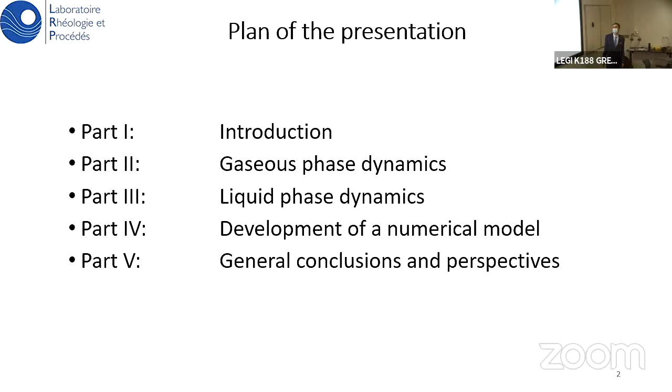Mixing operation in an anaerobic digestion process is a vital operation that aims at reducing non-uniformities in concentration and temperature, and increasing the surface of contact between the substrate and the bacteria, further increasing the yield of the mixing and the yield of gas production.

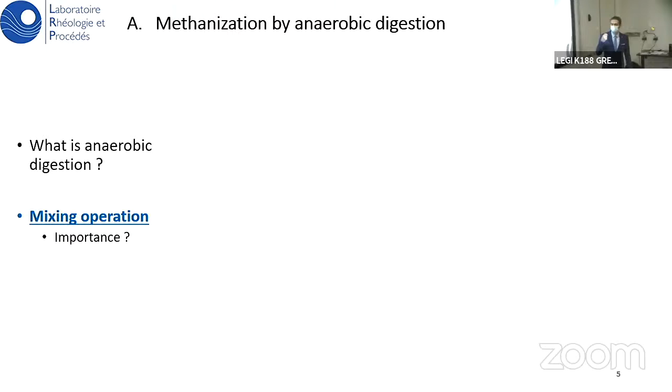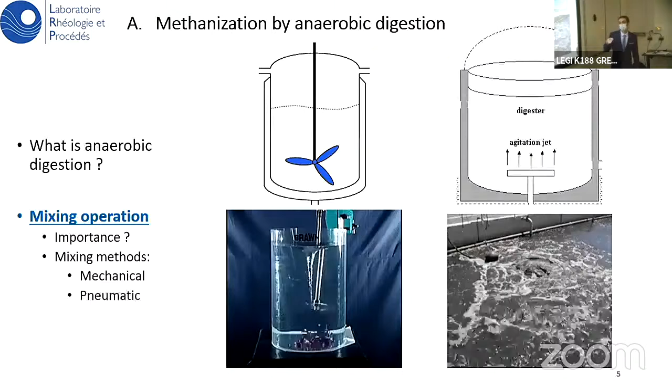It can be attained using two methods: either mechanically, by the use of an electric motor and an impeller that stirs the contents of the reactor, inducing mixing; or by pneumatic mixing, in which pressurized gas is injected inside the contents of the reactor, and the rising bubbles tend to agitate the contents of the reactor.

Pneumatic mixing holds some advantages, or more desirable effects, over mechanical mixing. Mainly, it is a simpler design with fewer moving parts, which causes it to be more cost effective in terms of operation and maintenance. It is also more process friendly, as the induced shear stresses are assured to be lower than the critical shear stresses tolerated by the bacterial culture.

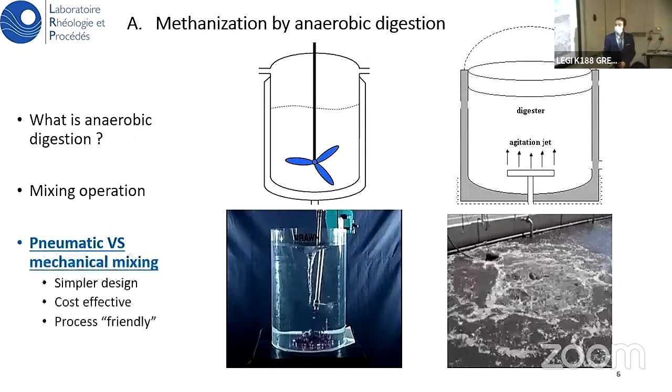Our study focuses on the ArkoMetha process. It is a novel anaerobic digestion process that implements pneumatic mixing as a way of agitation. We focus on the digester, and the flow inside the digester.

The digester is comprised of a cuboid tank with multiple compartments and multiple injection pipes. Pressurized biogas is injected inside the injection pipes, creating bubbles that tend to shear the fluid around them as they propagate upward and induce recirculation in the tank.

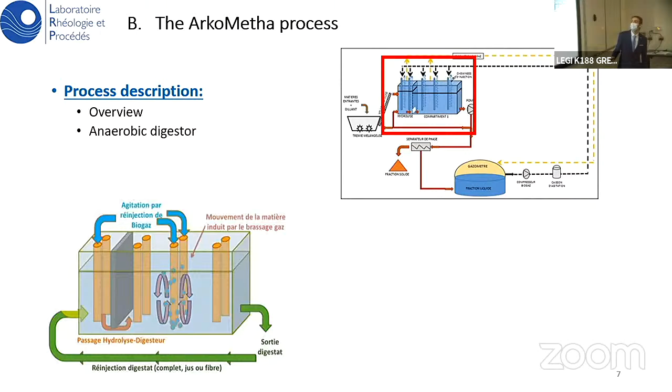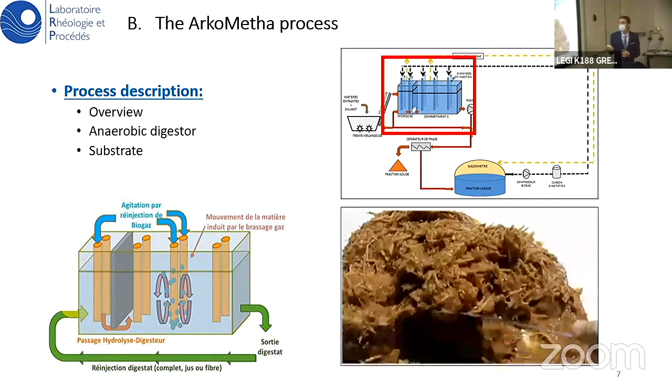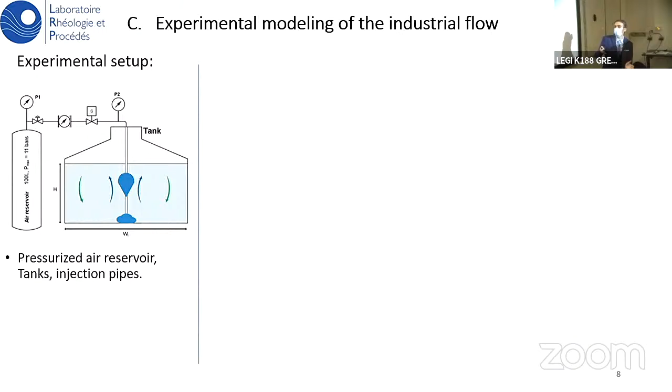The substrate used in Arkolia Energies is mainly a thick, fibrous sludge with high solid content of plant or animal origin. To model this industrial problem experimentally, we used the experimental setup present at Laboratoire Rhéologie et Procédés. It's mainly made of a pressurized air reservoir, as well as a tank connected by a piping system into a tank with transparent walls to aid in visualization.

We also have a solenoid valve and a flow rate sensor that allow us to work on a constant injection flow rate, as well as temperature and pressure sensors. Finally, we have a camera setup that allows the capturing of the flow in 3 dimensions.

Using the industrial material represents a health hazard and a logistical hazard, so instead we used carbopol solutions. These are aqueous solutions which are harmless, can be easily prepared, and are transparent.

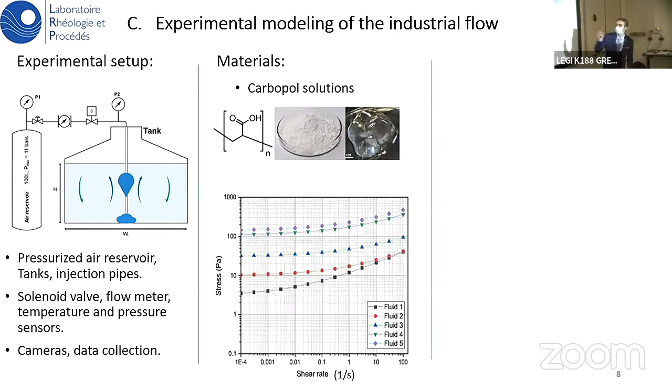This behavior can be fitted into the Herschel-Bulkley constitutive equation. In this equation, we have a certain yield stress. Below this yield stress, the shear rate is 0, so the fluid remains unyielded. Above this yield stress, the stress and the shear rate are related in a non-linear manner due to the shear thinning effect of the fluid.

This table represents some rheological parameters of the fluids that we prepared. Tau 0 is the yield stress, K is the consistency, and N is the flow index.

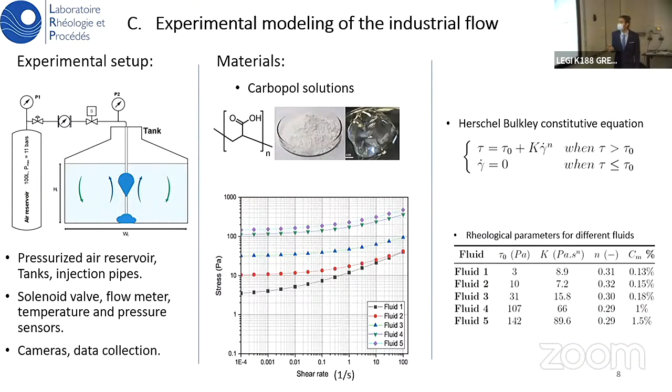The video here presents the initial experimental observations. As soon as the injection starts, a gas cavity, or a pocket of gas, is formed at the injection point. This gas cavity will expand and collapse in a periodic manner, releasing the gas into a newly formed bubble.

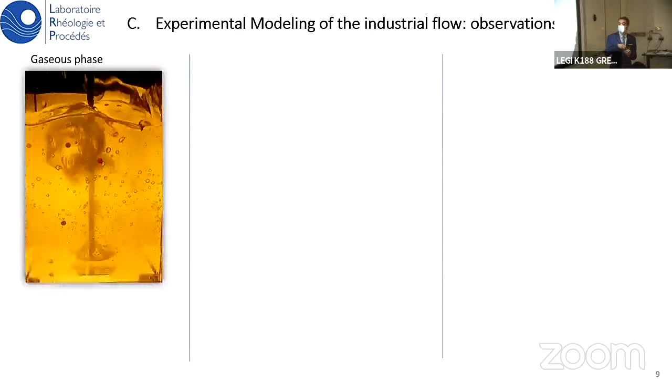The dynamics of the gas cavity were studied in detail and published in the American Institute of Chemical Engineering journal. But in general, the dynamics of the gas cavity have minimal effect on the overall mixing in the reactor.

After the gas cavity, a bubble is released. It propagates toward the free surface, carrying within its wake a small quantity of the fluid and shearing the fluid around it. When it reaches the free surface, it bursts, spreading this quantity over the whole cross-section of the reactor.

This gaseous flow will induce a liquid flow that can be summarized as follows. We have mainly 3 main regions or zones of the flow in the reactor. In the blue region, it is the rising fluid region, where the fluid tends to rise between 2 consecutive bubbles and around the rising bubbles. This upward flow rate is balanced by a downward flow rate, indicated here by the green region, inducing fluid recirculation.

Sometimes a third region will develop if the reactor is large enough, in which the fluid will remain stagnant, mainly at the extremities of the reactor and at the corners.

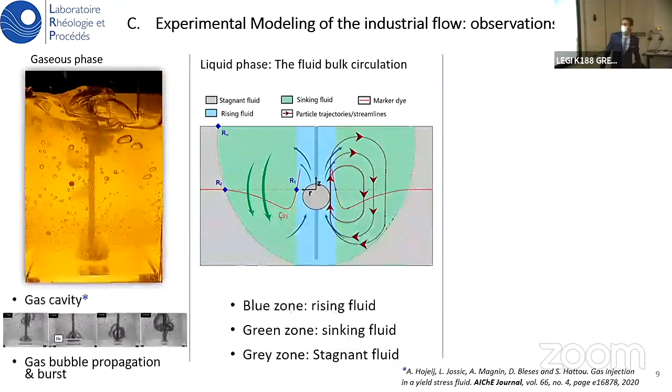To elaborate more on the specificity of our flow, we have a unique reactor design in which we don't have a draft tube that will separate the rising fluid and the descending fluid regions. We also cannot control the bubble velocity or the bubble volumes. In fact, we work on a constant injection velocity, and the bubble volumes are not controlled.

We have a non-Newtonian fluid with a yield stress. Inertial effects cannot be neglected; they play a role in the flow dynamics. The bubbles produced are relatively large, so the dimensions of the bubble and the dimensions of the reactor are comparable. Finally, we have a confinement effect due to the effects of the wall and the free surface, so the fluid domain cannot be assumed as an infinite medium. The final point is that the flow we have seems to be unsteady.

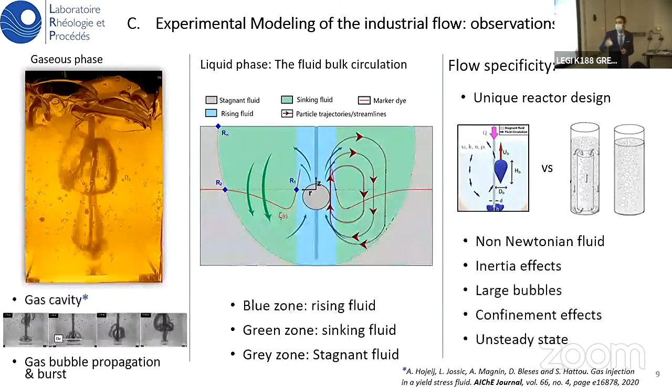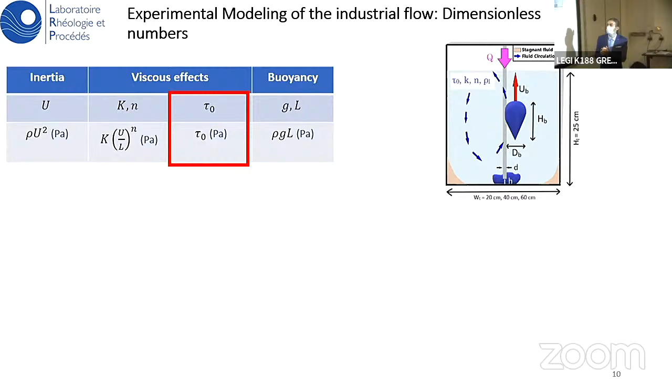To sum up the forces acting on the flow: we start with the inertial forces, a result of a certain scale velocity u, written as rho u squared in units of Pascal. The viscous forces result from the fluid's rheological parameters, including the viscous force due to consistency and flow index, written as k gamma dot to the power n, where gamma dot is the velocity scale over the length scale. The yield stress is already in units of Pascal, and the buoyancy is a function of gravity and length scale, written as rho g l.

The choice of length scale and velocity scale depends on the phase being studied. For the bubble phase, the length scale was chosen as the equivalent bubble radius, which gives a good estimation of the real bubble radius. The velocity scale was chosen as the square root of g times R, based on the assumption that for the bubble, inertial and buoyancy forces are equal, giving a good estimation of bubble velocity. The aspect ratio of the bubble is the height of the bubble over the diameter.

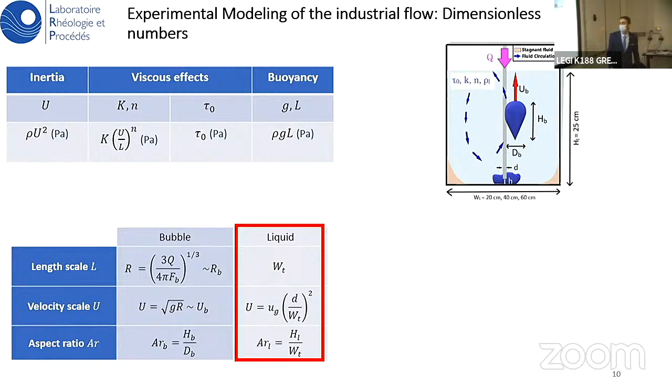For the liquid phase, the length scale is the width of the tank as indicated in the figure. The velocity scale is the gas injection velocity multiplied by a factor representing the ratio between the area of the injection pipe and the cross-sectional area of the tank. The aspect ratio of the reactor is the height of the liquid over the width of the reactor. So we can write these forces in a non-dimensional way.

We start with the Reynolds number, which represents the ratio between inertial and viscous forces, and the Oldroyd number, representing the ratio between yield stress and viscous forces. The Froude number represents the ratio between inertial and buoyancy forces. And the yield parameter represents the ratio between yield stress and buoyancy forces.

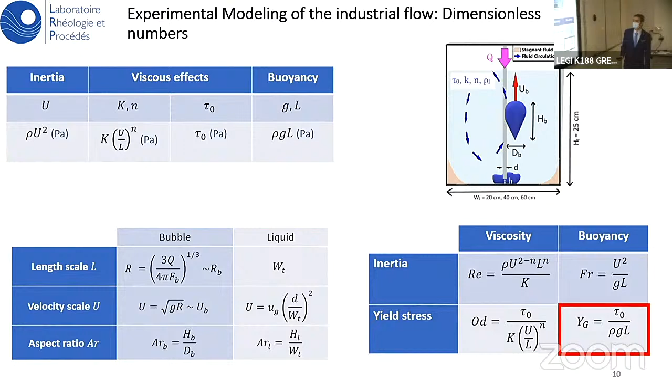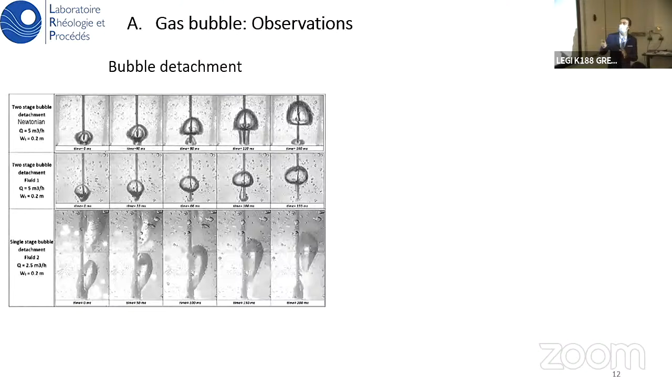Now I'll start with the gas phase dynamics, concerning the bubbles. For the bubbles created, we had two main observations. The first concerns the phenomena by which the bubble detaches. We differentiated between two detachment phenomena. The first is called two-stage bubble detachment, where two consecutive cavities collapse to create a single bubble. The first cavity creates the bubble cap, the second creates the bubble tail, forming a mushroom shape. These two cavities then collapse, creating an independent bubble that rises toward the free surface. This type of detachment was observed for fluids with low yield stress as well as for the Newtonian case.

The second detachment phenomenon, called single-stage detachment, is when each independent cavity is responsible for creating a single bubble, encountered with fluids with high yield stress. Generally, two-stage detachment occurs with low yield stress and high inertia, meaning a yield parameter lower than 0.1, while single-stage detachment occurs with low inertia and high yield stress, a yield parameter greater than 0.1. This threshold at 0.1 isn't strict; near 0.1, we can see both phenomena happening simultaneously, so it's not that simple.

The second observation is that as the bubble rises toward the free surface, its morphology and aspect ratio change over time. In the graph, we plot the aspect ratio of the bubble as a function of time for different fluids. For the Newtonian case and the low yield stress fluid, the behavior is similar: for the first 0.1 seconds, the aspect ratio increases as the bubble inflates, with increasing buoyancy forces stretching it vertically. At 0.1 seconds, the bubble detaches and collapses into an oval shape, decreasing the aspect ratio to around 0.75. After which, the bubble continues propagating upward, with its aspect ratio oscillating between these two values, keeping it oval shaped overall.

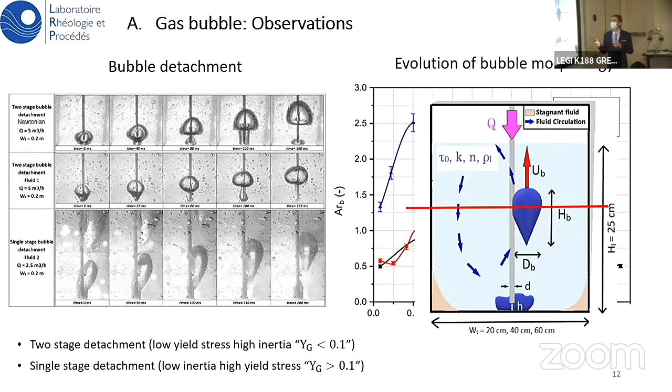Let's start with the bubble frequency. The graph plots the bubble frequency as a function of the injection flow rate for different fluids used. We can see first that as the injection flow rate increases from 2 to 10, the bubble frequency decreases, tending toward a plateau around 3.3 hertz.

The effect of the yield stress is more or less small or negligible, especially at high flow rates, at 5 and 10 meter cube per hour. We can see a certain difference in behavior between the Newtonian case, where the decrease is very slight and linear, and the non-Newtonian case, probably because of the elasticity of the fluid. In the yield stress fluid, the bubble tries to grab hold of the yield stress, keeping for a little longer period of time, so it increases in volume. Therefore, we reach a constant volume, a constant frequency.

Concerning the effect of the tank on the bubble frequency, we can see that as we increase the tank width, the bubble frequency will slightly increase to reach values of around 5 hertz.

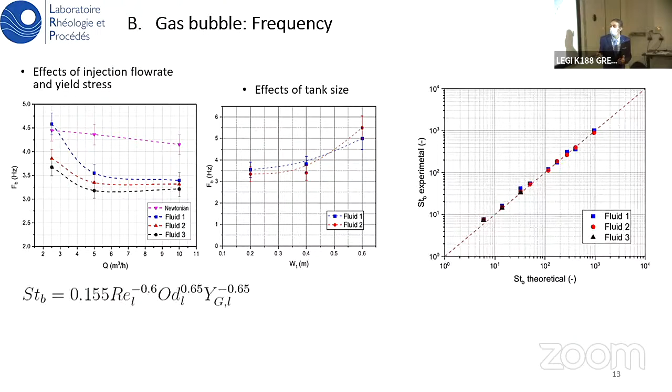So we try to represent the bubble frequency in a non-dimensional correlation as a function of the dimensionless numbers of the liquid phase. STB here is the dimensionless representation of the bubble frequency. First, we can see by comparison that Reynolds, Oldroyd, and the yield parameter have comparable effect in their absolute magnitude. If we write them by their definitions, this equation can be simplified.

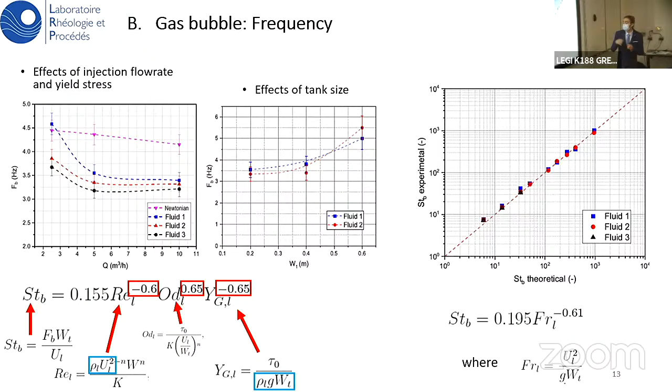We are only left with two terms: the inertial term that is in the Reynolds number, and the buoyancy term that is in the yield parameter. The effect of the viscosity and the yield stress will diminish. So finally, we can write this correlation in a more simplified manner as a function of only the Froude number, which is the ratio between the inertia and the buoyancy of the liquid phase. In fact, the bubble frequencies are governed by the balance between the inertial effects and the buoyancy of the liquid phase. This correlation allows us to finally get access to typical bubble frequencies.

Therefore, we can calculate the typical bubble volumes. From the volumes, we can define a certain length scale, which is the equivalent radius, as well as a velocity scale, based on the assumption that the inertial effects are equal to the buoyancy effects of the bubble.

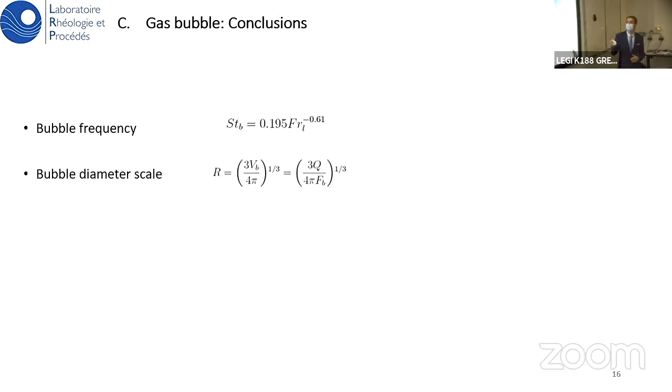So in conclusion, we started by estimating the bubble frequency starting from accessible parameters, or the dimensionless numbers of the liquid. It appears that the bubble frequency is governed by the balance between inertial and buoyancy forces of the liquid. Having access to the bubble frequency allowed us to define scaling laws for the bubble diameter, bubble velocity scale, as well as a correlation for the bubble aspect ratio, to estimate them in a non-dimensional manner.

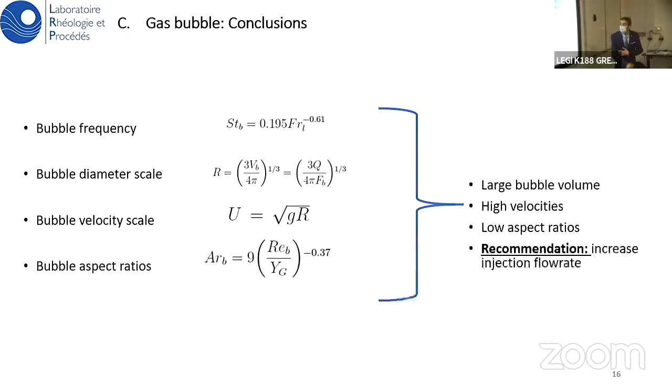In the context of mixing, larger bubbles are more desirable, high velocities are more desirable, and lower aspect ratios are more desirable. So it is recommended to increase the injection flow rate as much as possible, because the yield stress itself is an intrinsic property of the fluid, so I cannot change it. It's an intrinsic property of the process, so I cannot change the yield stress.

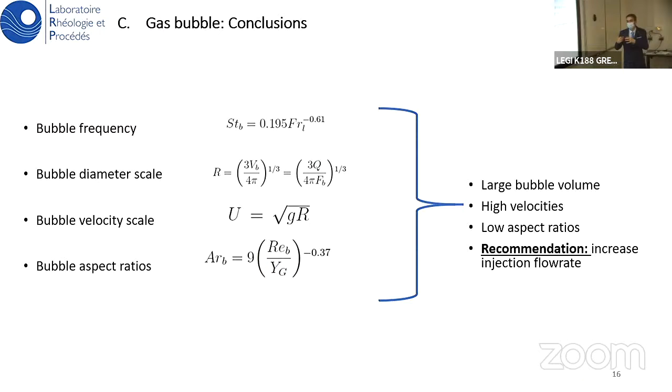We try to study this behavior using two methods. The first method aims at finding the average descending flow rate, or average fluid downward flow rate, and this downward flow rate is always balanced by an upward flow rate due to conservation of mass. The second method aims at finding the shape and extent of the actively mixed region, to define the mixed regions and the dead regions in the reactor. So we can start with the first method.

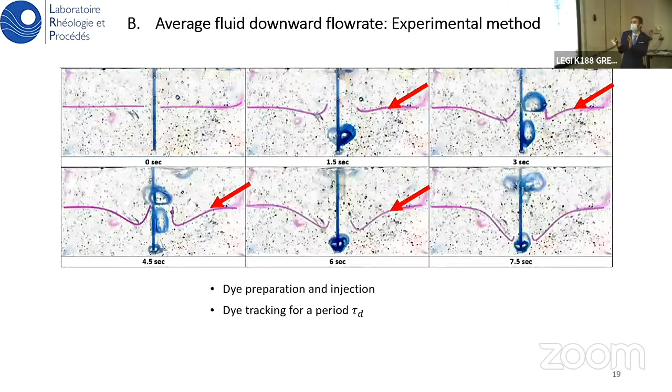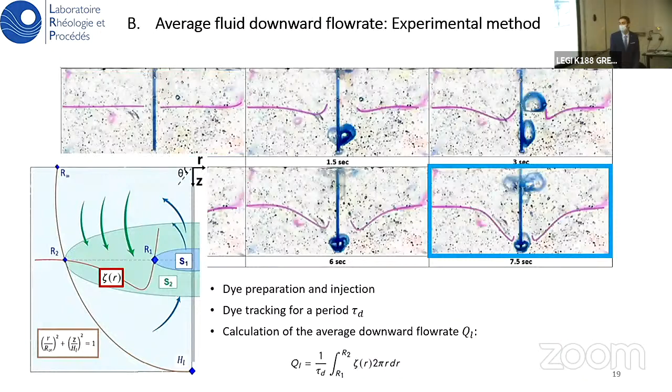The first method starts by injecting a colorant dye at HL/2 in the reactor, across the reactor, then tracking the evolution of this line as a function of time for a certain duration tau d. After which, when I plot this evolution, I can finally estimate the average downward flow rate by performing an integration in the cylindrical system R, Z, theta. So I can finally find the average downward flow rate using this equation here.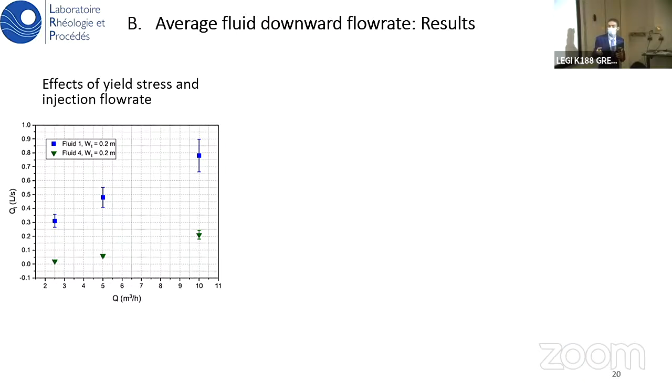I'll start by presenting the effects of yield stress and injection flow rate on QL, the average fluid flow rate. As we increase the injection flow rate, QL increases. This is expected because increasing the flow rate produces bubbles with lower aspect ratios, larger bubbles, which agitate a larger quantity of the surrounding fluid. Whereas increasing the fluid yield stress tends to drastically lower QL values, which is expected because fluids with higher yield stresses are more resistant to flow.

But keep in mind that the QL value by itself is not a good representation of the quality of mixing, because it doesn't take into account the total fluid present in the reactor compared to this QL. So we defined a dimensionless QL, called QL star, which is the experimental fluid flow over a characteristic fluid flow.

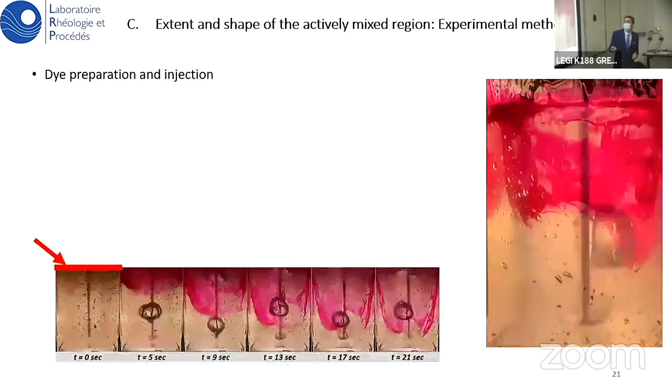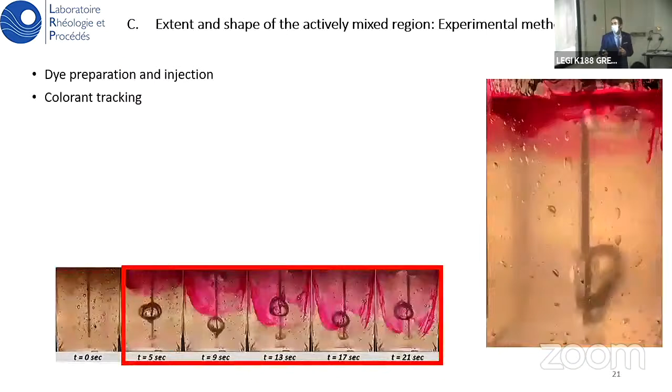The second method aims at finding the extent and shape of the actively mixed region. It starts by preparing a colorant dye and spreading it across the free surface of the reactor. As time passes and injection commences, we track the colored region as a function of time. Finally, we are able to estimate the mixed volume starting from the 2D projections of this shape, using this simple equation.

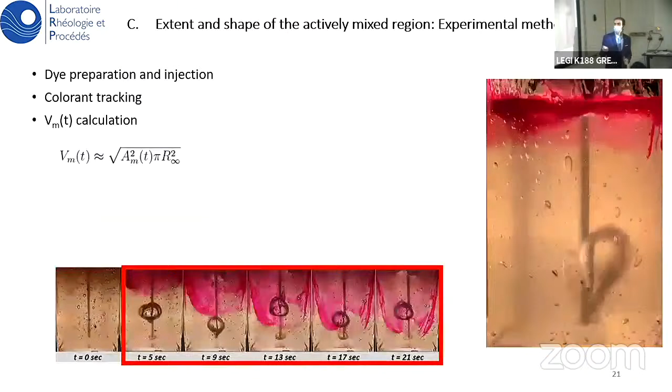The final step is normalizing this mixed volume by dividing it over the total volume and fitting it into the following exponential equation. This graph plots the evolution of the dimensionless mixing volume for the same fluid at three injection flow rates, for a low yield stress fluid.

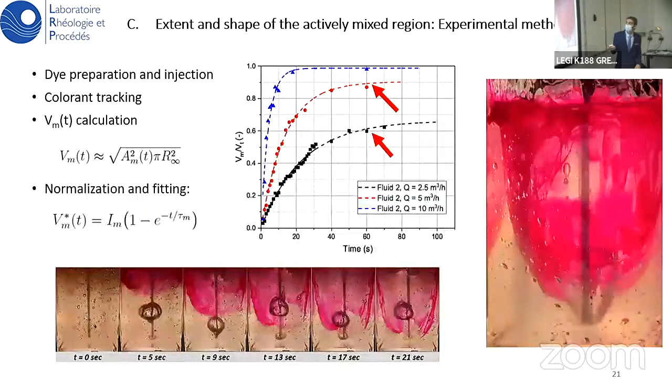This correlation has two main parameters. IM represents the maximum mixed ratio. The arrows indicate the trend of IM as a function of increasing the fluid yield stress, the injection flow rate, or the tank width. A red color means an undesirable effect, a green color means a desirable effect. IM represents the maximum volume that could be mixed as time tends to infinity.

The second parameter is tau m, a characteristic time of mixing. We assume IM is reached after 3 tau, and the arrows in the same way represent the trends in tau m as a function of changing the experimental variables. We can see that increasing the injection flow rate leads to a desirable effect on both the value of IM and the mixing period, whereas increasing the tank width or decreasing the aspect ratio of the reactor leads to adverse effects on both parameters.

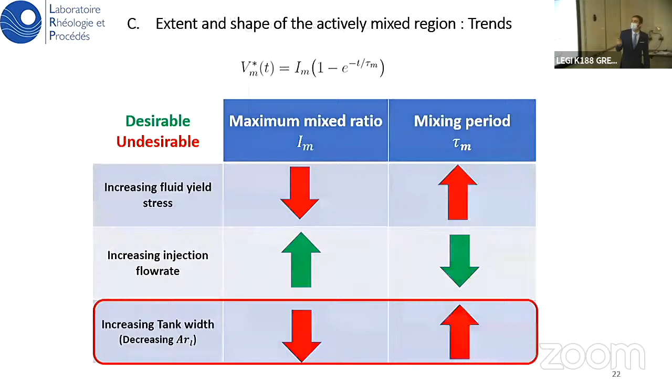After that, we tried expressing IM, which is dimensionless by nature, as a function of the dimensionless numbers that represent the liquid phase. We can see that the aspect ratio of the reactor plays the largest role: increasing the aspect ratio will increase the value of IM, whereas the Reynolds number (inertia) and the yield stress play equal but opposite effects on IM. Increasing the inertia will increase IM, while increasing the yield stress will decrease IM.

The final step was finding the circulation time, using a cross-validation between the two methods in order to find an average circulation time, or an order of magnitude of the circulation time, which is the time needed for a particle to complete a full circulation in the reactor. We started by defining a descending velocity and a rising velocity based on the QL value and the cross-sectional surfaces. From these velocities, we can define a descending time and a rising time.

So the circulation time can be estimated as the time needed for descent plus the time needed for rising. We can see that the circulation time is a function of R2 squared. R2 is the extent of the yielded region at HL over 2.

If we assume an axisymmetric flow, and if we assume also that the shape of the mixed volume has a semi-ellipsoidal shape, we can write the function that describes this extent of the actively mixed region.

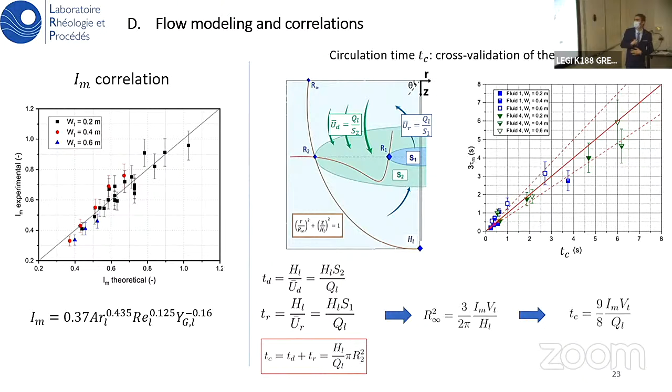So in fact, for the circulation time, increasing the volume mixed will increase the circulation time, and increasing the fluid flow rate will decrease the circulation time needed.

So in conclusion, we studied the liquid dynamics using two methods. The first method finds the average fluid downward flow rate. We produced also a correlation for that. The second method defines the actively mixed ratio IM with a correlation for that. Then we used both methods in a cross-validation process to find an order of magnitude of the circulation time in the reactor.

In the context of mixing, it's recommended to work with tanks with high aspect ratios and high injection flow rates.

The results of this chapter were also the subject of a submission to a journal of the American Institute of Chemical Engineers.

Part 4. So now I've finished the experimental part. I can see from the experimental part that there are still quantities that are missing or inaccessible, such as the local fluid velocities. So we tried to develop a numerical model to tackle this problem.

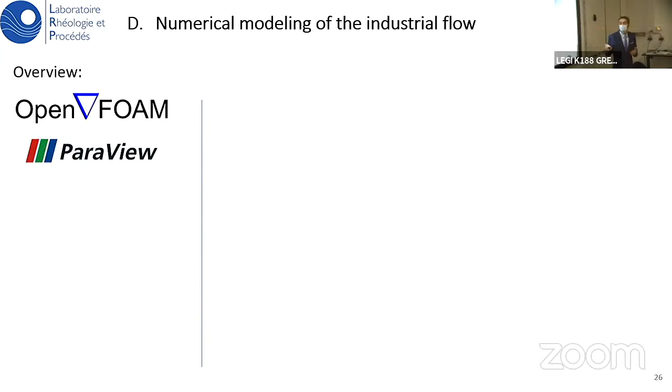The numerical model was built using OpenFOAM, an open source software that allows the solution of CFD problems. ParaView was also used for data visualization and post-processing. In general terms, the model considered the VOF method, the volume of fluid method, with a 3D dynamic mesh as well.

We considered 6 cases: 2 fluids, a low yield stress and a high yield stress, and 3 flow rates in each case.

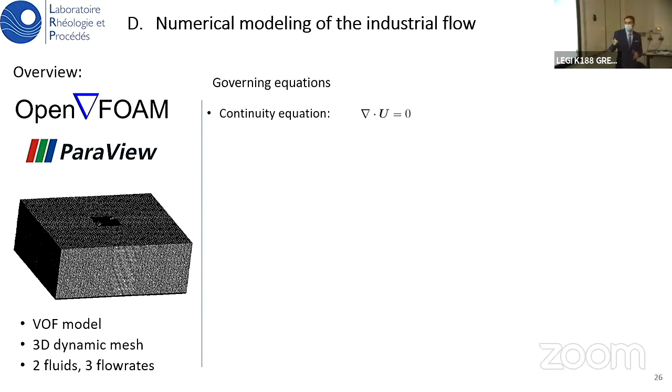The governing equations of the VOF method are mainly summarized by the continuity equation in its incompressible form, the momentum conservation equation, and the phase fraction transfer function.

Concerning the fluid modeling, we modeled the gas that is injected as a Newtonian gas, whereas the liquid present in the reactor is modeled as a regularized Herschel-Bulkley model. So it's a biviscous model.

This model assumes the presence of a certain critical shear rate, called gamma dot C, which is equal to the yield stress over the creeping viscosity at 0. So below this critical shear rate, the fluid will tend to behave like a Newtonian fluid with very high viscosity. Above this critical shear rate, the fluid will follow the normal Herschel-Bulkley behavior.

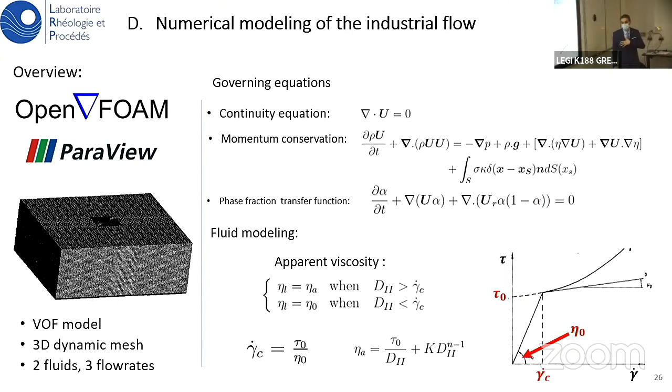This is done just to get rid of the discontinuity at 0 and the problems it introduces to the numerical solver. So it's very important to choose an eta 0 creeping viscosity as large as numerically possible. So the natural first step was doing a creeping viscosity sensitivity analysis.

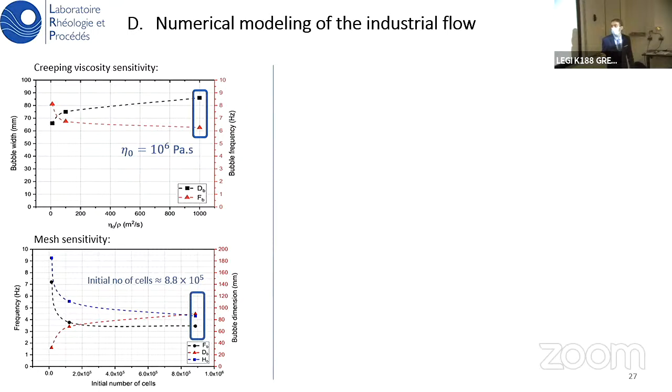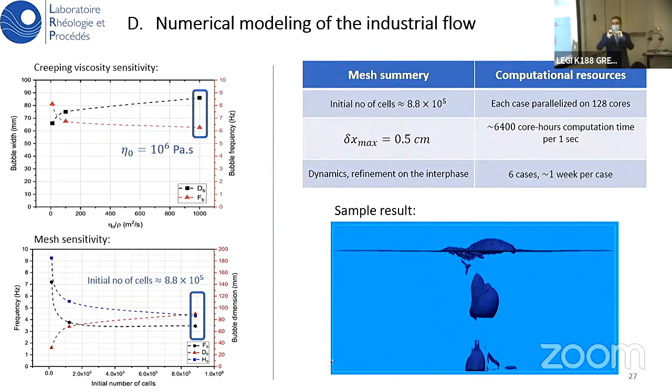As a summary of the mesh, the mesh has an initial number of cells of 8.8 times 10 to the power 5, with a maximum cell spacing of 0.5 centimeter. The mesh itself is a dynamic mesh, and we have refinement at the interface to decrease this delta x and better capture the interface, reducing the inherent diffusivity of the VOF model.

Concerning the computational costs, each case was parallelized on 128 cores, generally to simulate 1 second of flow. 6,400 core hours of computational time are needed. This is an order of magnitude; it changes depending on the injection flow rate and the fluid rheology. We considered 6 cases, and each case took around 1 week to complete 3 seconds of the simulation, something like that.

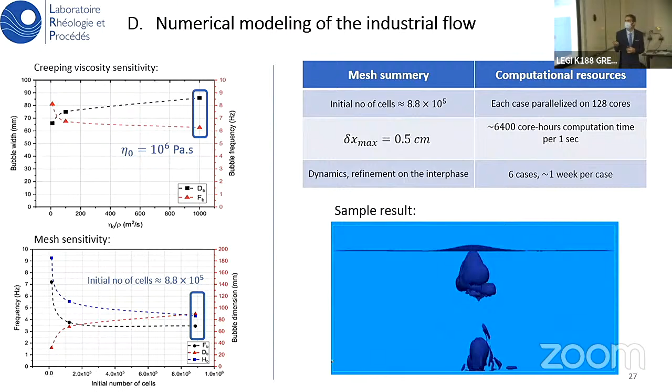The video shows a sample result of the numerical simulation.

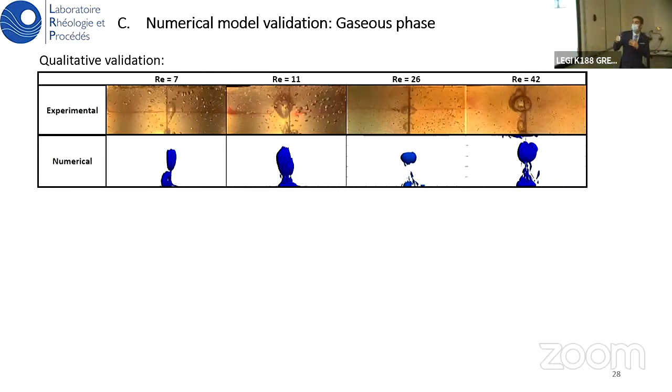We can start with qualitative validation of the model, by visual validation. The table plots the experimental observations of the bubble shapes compared with the respective numerical observations for different Reynolds numbers. We can see there's a good agreement just from visually examining the figure between experimental and numerical results.

Now concerning the liquid phase, we try to simulate the 2 methods that we performed experimentally by performing Lagrangian particle tracking. This Lagrangian particle tracking is a post-processing step.

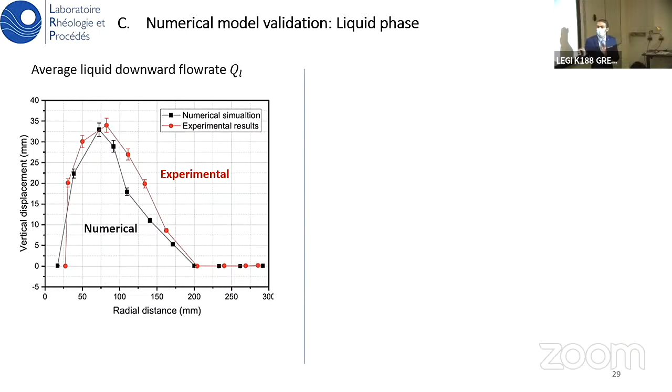Concerning the QVL method, we have 2 results: the one produced from the Lagrangian particle tracking, or the numerical result, and the experimental result from the QVL method. We can see there's a good agreement between the numerical and the experimental result.

We can also perform Lagrangian particle tracking by placing a line of particles at the free surface of the fluid and tracking the evolution of these particles as a function of time. Even if the simulation duration is short, which is 3 seconds, we can assume that the velocity field is periodic and simulate the flow for larger amounts of time.

Finally, here we can see a comparison between an experimental result and a numerical result found by Lagrangian particle tracking.

I just need to mention that the results of the numerical model were the subject of an accepted publication in the American Institute of Chemical Engineers journal as well.

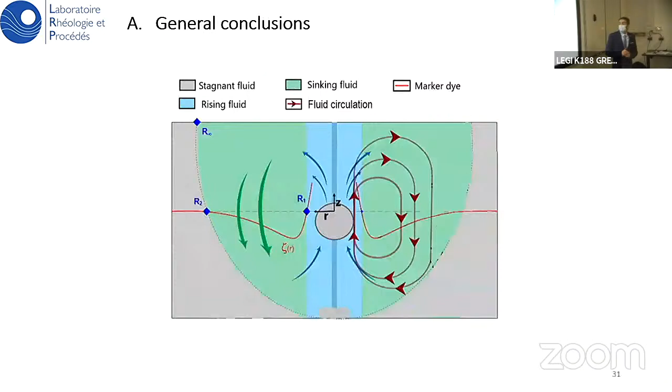So finally, conclusions and perspectives. First, concerning the gas cavity, we concluded that it is more or less a local phenomenon with minimal effect on the overall mixing of the reactor, so the gas cavity can be neglected with respect to the mixing of the fluid in the reactor.

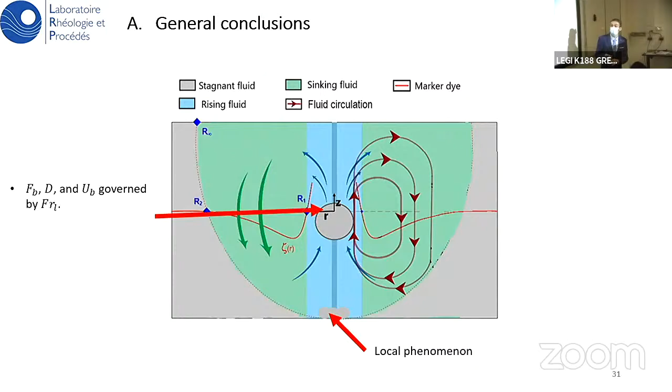Concerning the gas bubbles, the bubble frequency, diameter, and rising velocities are governed by the balance between inertial and buoyancy forces of the liquid. The aspect ratios are mainly governed by a competition between inertial forces on one side and yield stress and viscous forces on the other, with minimal effects of the wall. So larger aspect ratios and larger bubbles are recommended, meaning it's recommended to work at a high injection flow rate.

Concerning the liquid phase, the mixed ratio IM and the circulation time TC are mainly affected by the aspect ratio of the reactor, the liquid viscosity, and the injection flow rate. So it is recommended to work with high aspect ratios of the liquid and the highest possible injection flow rate.

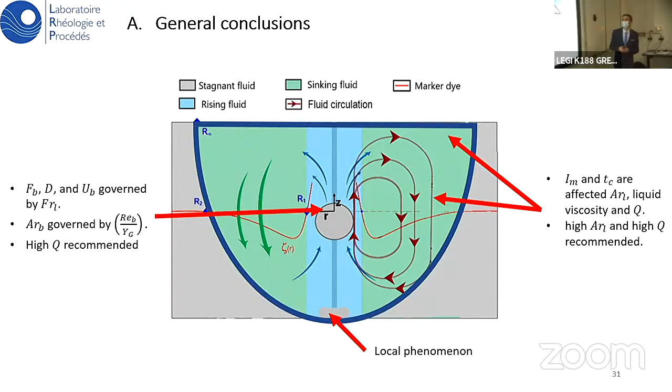So here finally we try to use the correlations that we produced just to get orders of magnitude of certain flow characteristics in an industrial case reactor. We consider a 200 cubic meter reactor with 20 compartments, making a single compartment of around 10 cubic meters.

We also consider fluids ranging in yield stress from 68 pascals up to around 1,000 pascals. These fluids were taken from a previous PhD, and they resemble the rheology of the real fluids used in the industry.

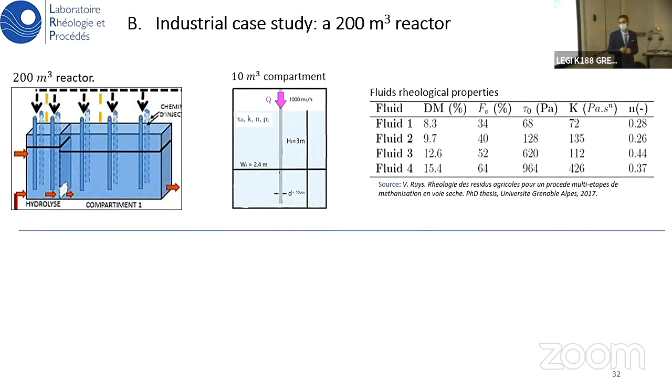it means that the compartments are not interacting with each other. And when you have a D star infinity larger than 1, it means that the different compartments are interacting with each other. So these correlations present an operational tool for roughly estimating key flow parameters and can be used in the preliminary stages of designing such reactors.

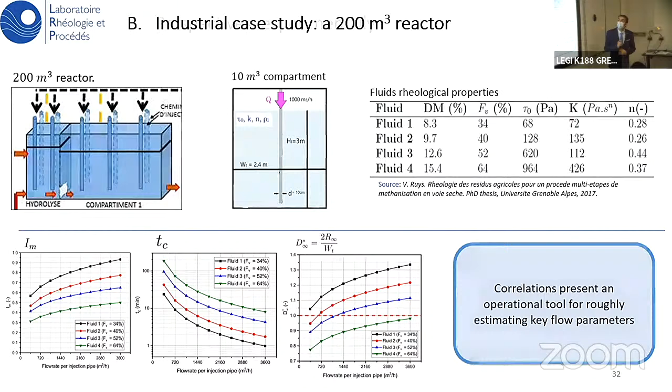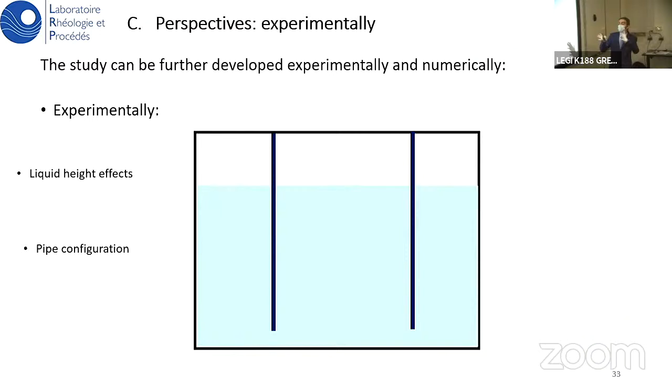It is also interesting to take the pipe configuration into account. For example, doing an injection at HL/2 and checking how this injection changes the flow profile inside the reactor. We can also consider multiple injection points to test for the interaction between multiple injection points and try to finally find an optimal spacing between the pipes that can be used.

Finally, we can also work with liquid suspensions by considering buoyant particles dispersed inside the fluid. The idea is that when the injection stops, the buoyant particles would tend to rise toward the free surface, creating a segregation in the liquid phase. This will allow us to finally define an optimal duration between two injection cycles, for example, to prevent this separation.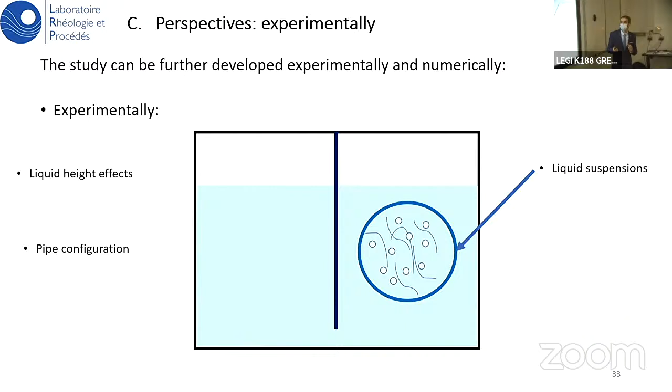From a numerical point of view, the numerical model can be further utilized in many ways. First, the geometry can be easily modified, so the reactor dimensions and the pipe dimensions can be easily modified. The initial conditions can also be easily modified, so the injection flow rate as well as the fluid rheology can be modified directly.

The numerical model, finally, which is its main goal, allows us to access parameters that are inaccessible experimentally. For example, the velocity field evolution, as we see in the video, which is the local velocities present in the liquid as a function of time.

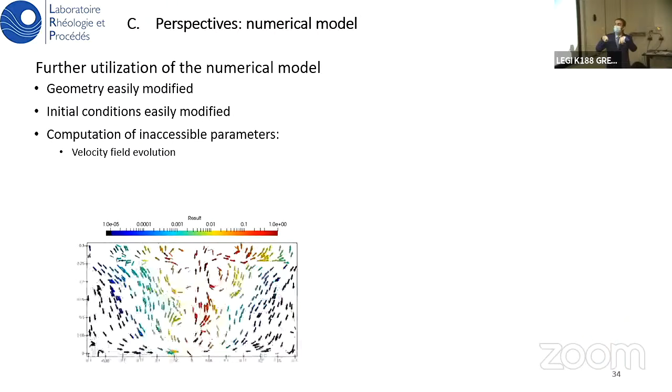It also allows us to define the shear rate map starting from the second invariant of the velocity field, and the evolution of this shear rate map as a function of time. We can also perform Lagrangian particle tracking to find average liquid kinetic energy or average power input into the reactor. We can also calculate an average phase velocity, which is the velocity over all points and all time steps, to get a quantity that represents the liquid flow in the reactor.

Okay, I have another question about the bubble velocity. Can you go back to slide 14, please? Okay, 14? Yes.

So it's a question about the second graph. I agree that you can use the scale velocity as the square root of gravity and the radius to build dimensionless numbers, for example. But in general, for large bubbles, we use the Taylor and Davis relation to estimate the bubble velocity, which is close to that, but you have a coefficient around 0.66 before the square root. So if you use the relation of Davis and Taylor, given in several books like Clift, Grace, and Weber, you have a slope not of 1, but 0.66.

Can you comment on why you did not compare with this relation? Is there a reason or no? I just didn't know about that correlation. The idea is, even for the factor that we need to add, is this the factor for a Newtonian fluid or for bubbles in non-Newtonian fluid? In this relation, there is no Newtonian effect because it's just an inertia effect.

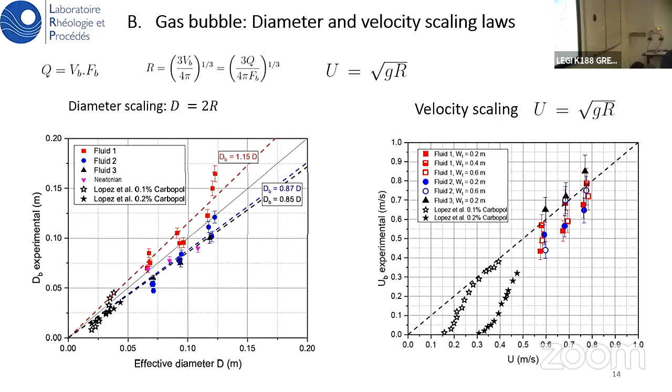18? Yes, for example. This one? Yes, okay.

So I think you explained that you use the downward pipe, and you explained that it's better for mixing, but I don't know exactly why it's better for mixing. You explained some - which one? With the downward pipe, why is it better for the mixing? For the downward pipe? Yes. Why is it better for the mixing with this kind of gas injection?

As we previously discussed, it's probably because we need larger bubbles. So this configuration will give some time for the bubble to reach a larger volume. It's probably, but here in this slide, I didn't mention that the downward injection is better for mixing.

I agree. Okay, yes, but I think because when performing a downward injection, the bubble will spend a slightly longer time, held by the yield stress around it, to inflate a little more. So it just gives a briefly larger time for the bubble to reach a larger volume, rather than upward injection. Because in the upward injection, in fact the high inertia of the gas will act upward along with the buoyancy.

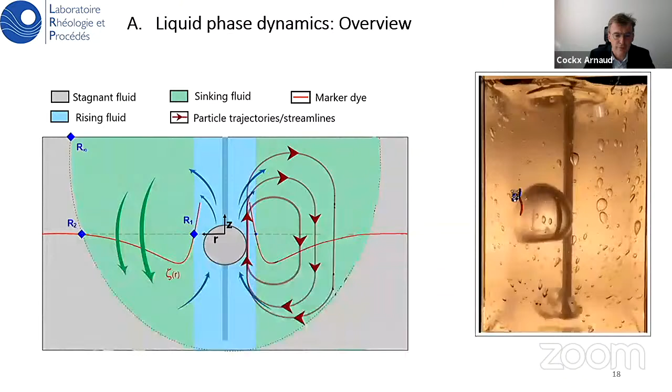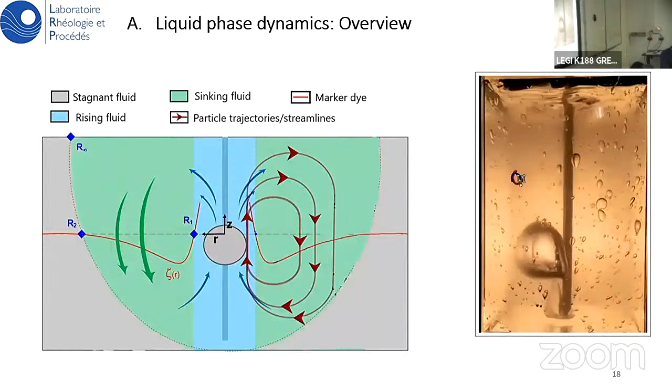So when you have an injection, an upward injection, you create a jet, and the bubble will detach somewhere higher. So I think you will create a dead zone at the bottom.

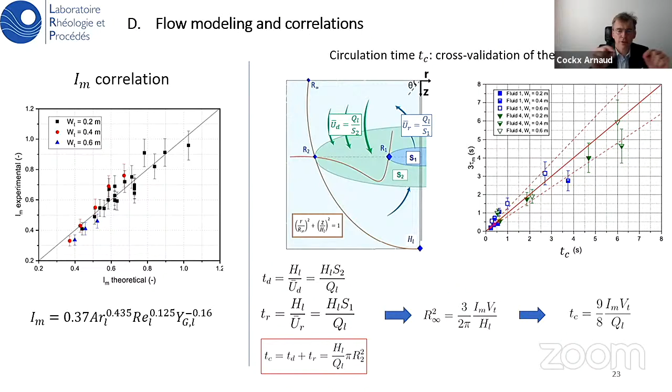Can you go back to your experimental results with the color lines for the velocity measurement? Yes, because in these results... wait, color line, which means this one? Yes, it's a very nice technique. Yes, it's very nice.

Just a technical question: how do you put the line initially? What I do is first, on the top of the reactor, I mark the middle of this edge and the middle of this edge, to make sure it is in line with the injection pipe. Then I place a track, which is an aluminum track. After that, I devise something so I could move the track, move an injection syringe along the injection track. I also tried an injection syringe with an edge, so the edge has an angle, in order not to inject directly downward and create a very bad shape. So I want a straight line. I can... it's something like that, I don't know, it's something like that. The injection syringe is something like that. I start next to the wall and move the syringe along the track. This height is set at H_L over 2.

Thank you. I come back to my question about the elastic properties of the fluid. Here it seems that when the bubble rises in the liquid, after the bubbles, it seems that the fluid comes back to the bottom of the tank, like in an elastic, viscoelastic solid. Do you observe this kind of behavior experimentally? In the numerical result, you mean? No, experimentally. Is there some oscillation, like oscillation in the response? Yes, in fact...

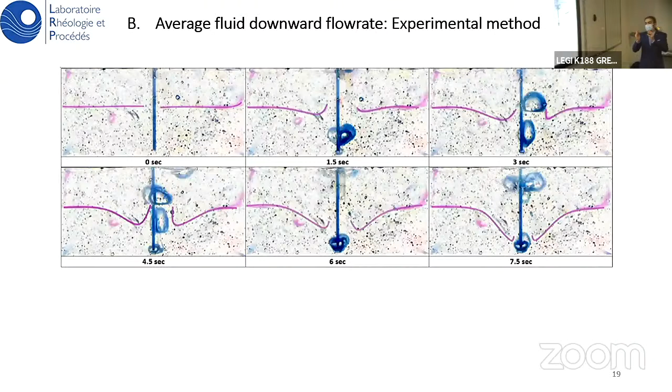When you have a high yield stress fluid, I tried once putting some particles in the fluid at different locations, and tracking these particles as each bubble passes. So I plotted the 3D trajectory of the particle, and you can see that during the passage of a single bubble, the particle will only move locally, it's not moving within the fluid overall. The fluid is only compressing and decompressing by the passage of the bubble, so it makes a closed circle. I had some results there, but I removed them due to time constraints. But I have some comparisons between high inertia, low inertia, high yield stress, low yield stress.

When you present the numerical results, you present the frequency and the bubble size for several gas flow rates. Yes, I think it's this one.

Do you try to check that the gas flow rate is equal to the frequency times the bubble volume? Numerically you can check the accuracy this way. Do you try to do this? No, honestly, but I get your point. We can check it, but it's more to have confidence in your results about the frequency, for example, because it can be difficult to measure.

Sometimes you get the diffusivity between two consecutive bubbles. With the volume of fluid fraction, we can lose some gas, maybe. I think we can lose some gas, so there will be some error, of course, because the interface is not perfectly captured.

So the model considers refinement at the interface to try to capture as much as possible the interface of the bubble. But I think it's a good way to check the balance of the gas this way.

Yes, I think we can try by sorting alpha, where alpha is equal to 0 and alpha is equal to 1, and finding the volume where alpha is equal to 0. That could be done. I have another technical question about the injection pipe.

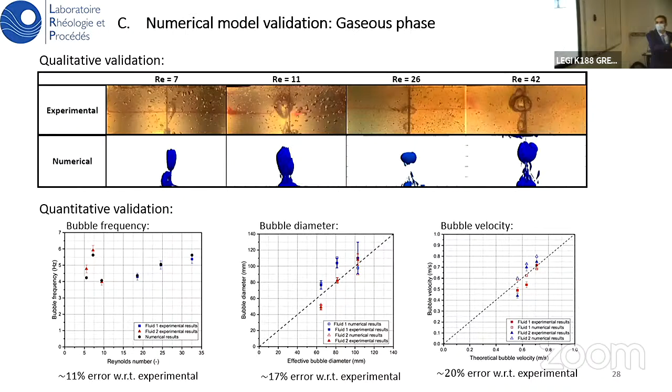Yes, I got your idea. The idea is that we are trying to extrapolate from results made on, for example, a 10 liter reactor to something of 10 cubic meters, which is 1,000-fold larger. Of course, we are asking something from the model that it cannot fully provide.

But the idea was just put there as an example that we can use these correlations. If not for an industrial reactor, we can use it for something like a pilot scale reactor, because we have an experimental scale, we can have a pilot scale, then the industrial scale reactor. For example, Arkolia are working with something around the pilot scale, around 4 to 6 cubic meters.

So I think it is important to check the validity of these correlations as we increase in scale, because we cannot directly assume that scale invariance is followed from 10 liters up to 200 cubic meters. It was just a demonstration of how we could use these results, for example, for designing at least the middle scale, between the industrial one and the experimental one. Yes, but I'm not convinced by this comparison. I'm more convinced if you use OpenFOAM, for example. OpenFOAM would take into account the scale-up of the reactor, but not the correlation.